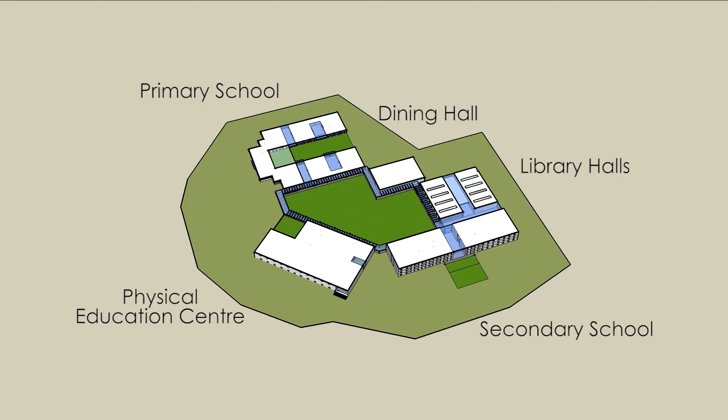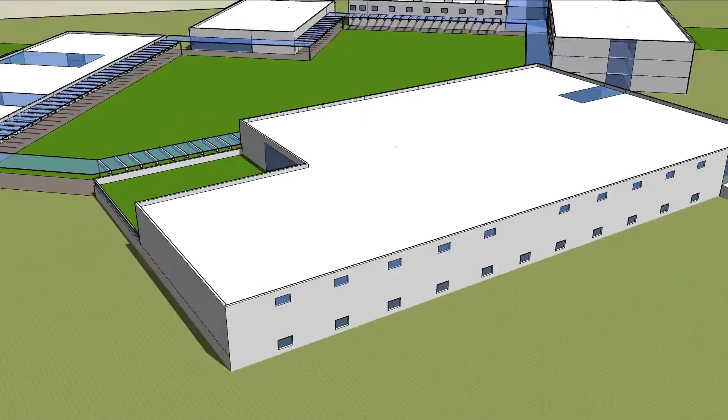As the school mixes ranges of ages and uses, we consider splitting these up into different building blocks that are linked by a central heart green space to keep the spirit of a whole community school. The school also has a physical education centre on site, and to encourage the spirit of community, this is accessible to the public. The new facility is located in Bristol, UK, at latitude 51.45 degrees north.

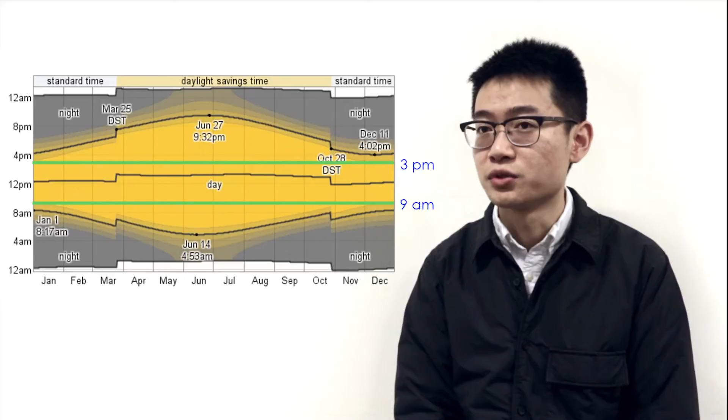Due to the relatively high latitude, the buildings are mainly east-west oriented in order to maximize their south-facing facades. As students have classes between 9 a.m. to 3 p.m., daylight will always be available through the day, and we've taken advantage of this in our design.

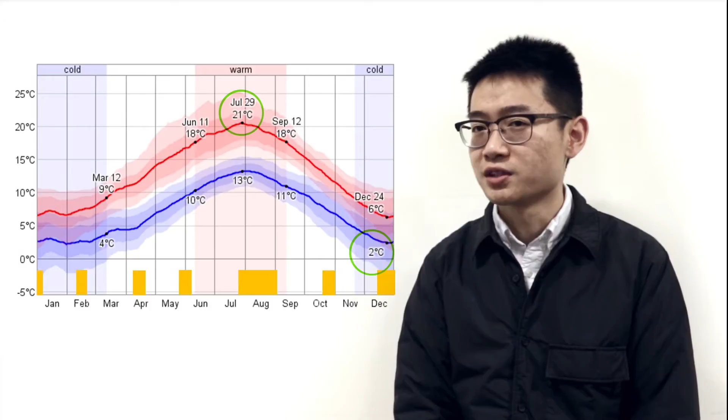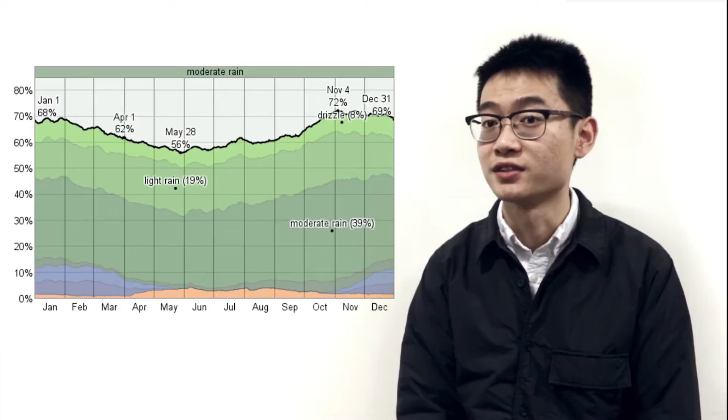The average temperatures in Bristol range from 2 degrees C in December to 21 degrees C in July, so space heating seems unavoidable in certain months of the year, and the heating system will be chosen carefully in order to reduce the carbon emission of the buildings as much as possible. As the probability of precipitation oscillates between 56 to 72%, the buildings are designed to minimize the occupants' exposure to the rain by providing a well-connected, semi-open walkway.

Excluding the space reserved for the setback of 5 meters, the site has an available area of 80,000 square meters. There are two possible access points, one from an existing car park and another from an existing pathway. The surrounding area is mainly residential and the buildings are not exceeding 2 stories. Thus, the site is not affected by any shading or obstruction.

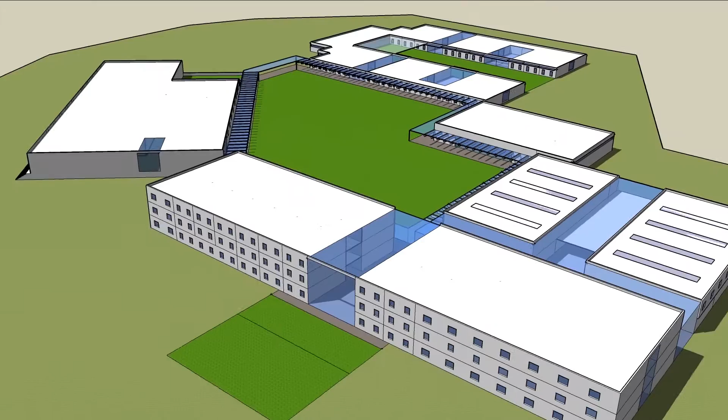Passive design enhances the energy performance of the school to a great extent. Thereby, the school was designed according to the passive house standard from the beginning. The atriums in the secondary school and in the library and the halls create a buffer in winter, which leads to considerable energy savings. The roof light system in the primary school and in the library not only provides high-quality natural light, but also minimizes the artificial lighting.

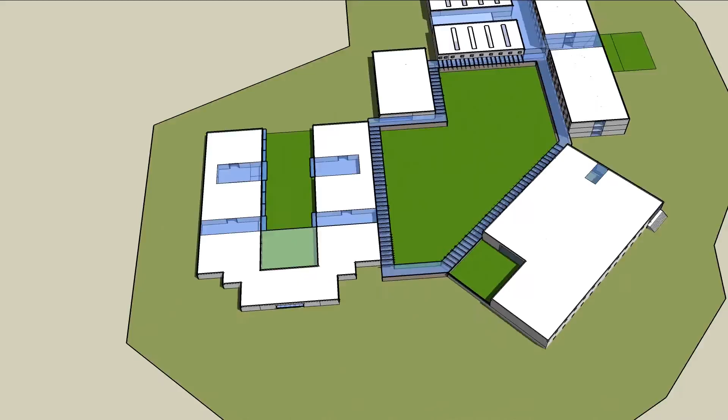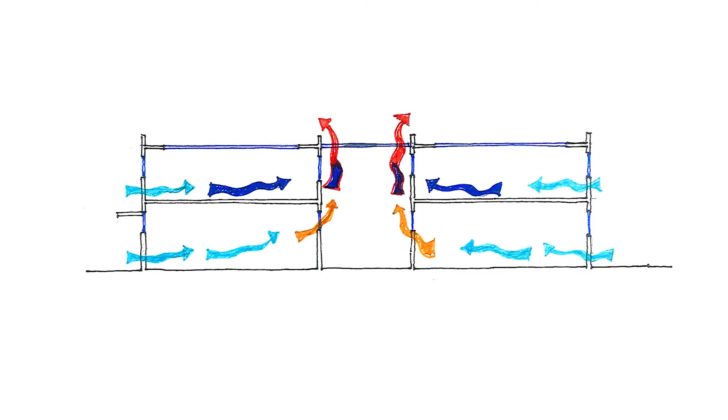We are providing automatic as well as manual controls to all the openings, so that the occupants can feel more in control of their own environment. Timber is the main material used for construction. The timber frame construction is structurally durable for low and mid-rise buildings, and since all of our buildings are within 3 stories high, this was a suitable option. The main advantage of timber is its low embodied carbon. Moreover, its prefabrication capability could lead to a shorter erection period as well as better quality control.

Thermal performance of the facade is a decisive factor of the overall energy performance of a building. As a low-carbon project, the U values of the building envelope, along with the air tightness, are all designed to achieve a passive house standard. As our design tries to benefit from daylight as much as possible, we will also consider glare problems and tackle them thanks to adequate shading devices. This will also avoid the possibility of overheating in summer. The use of renewables will be seriously considered to reduce the CO2 emissions from our building, and the economic feasibility of the possible options will be studied in detail.